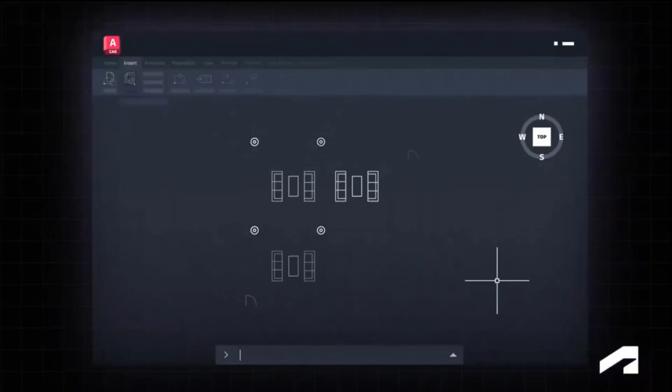Or game-changing innovations like Autodesk AI, which unlocks powerful insights and immediate ways to accelerate your creativity, and intelligent features like Smart Blocks, which let you quickly define and group objects so you can roll out edits project-wide.

Or workflow optimizers like Autodesk Docs and AutoCAD on the web, which help you collaborate and sync feedback from multiple reviewers on projects. Great design doesn't come into this world by chance—great design starts here. AutoCAD, trusted by millions.

AutoCAD 2026 arrives with promises of speed, intelligence, and seamless collaboration. But does it deliver? In this investigative breakdown, we analyze the real impact of its new features, separating hype from tangible innovation.

Let's dissect what's new, who benefits, and where Autodesk might be cutting corners. First: performance. Faster than ever?

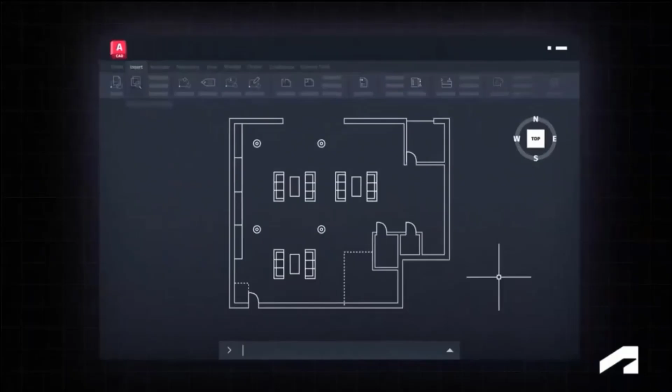AutoCAD 2026 claims 11x faster 2D or 3D file opening and 4x quicker startup times for network stored DWGs. While these metrics sound impressive, real-world gains depend on hardware and network environments.

Asynchronous raster loading lets images load in the background, reducing wait times for complex drawings. Fast shaded mode enhancements bring new hidden and conceptual visual styles that improve navigation in large 3D models.

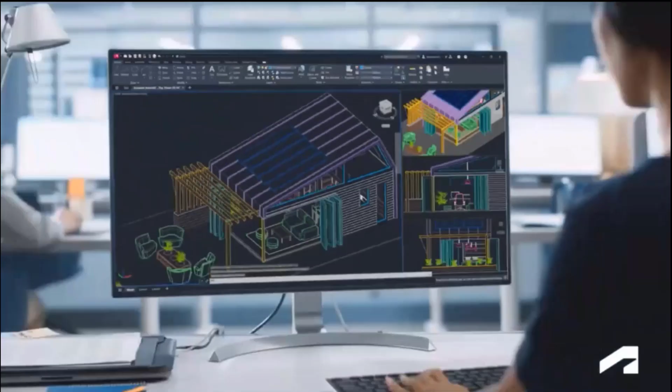GPU text optimization provides better rendering for CJK and RTL languages, such as Arabic and Korean, using DirectX 12.

Performance upgrades are significant but hardware dependent. Users with older systems may not see drastic improvements.

Second: AI-driven workflows, where smart blocks take center stage. Autodesk AI is now deeply integrated, but its practicality varies.

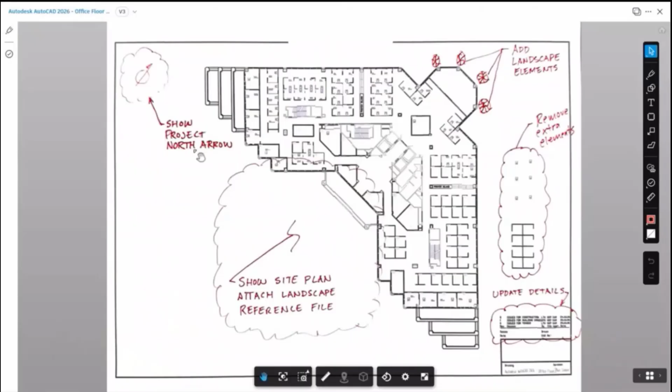Smart blocks support search and convert, handling text variations like converting variable text, for example room numbers, into block attributes, automating repetitive tasks. Ribbon accessibility has improved too—BSRCH, previously command line only, is now ribbon friendly.

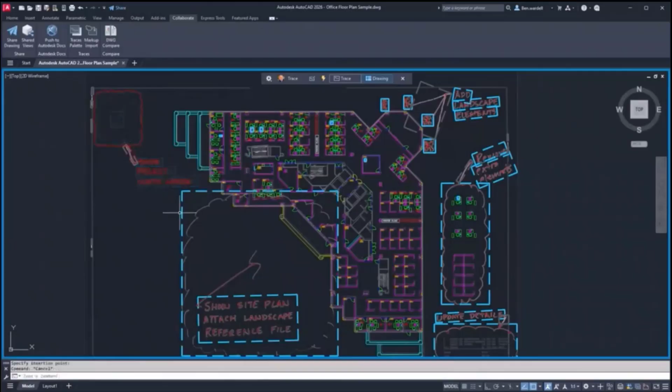Smart blocks also support detect and convert. Machine learning detection identifies architectural objects like doors and toilets for block conversion, but struggles with non-architectural geometry. Primary instance editing refines detection results by modifying the seed object.

While powerful, detect and convert remains a tech preview with limited scope. Architects benefit most; mechanical designers gain less.

Collaboration, cloud integration or lock-in: AutoCAD 2026 pushes hard on cloud-connected workflows, but not all users may welcome the shift.

Connected support files, project-specific fonts, templates, and plot styles sync via Autodesk Docs, reducing manual setup. Multi-user markups allow simultaneous feedback via Autodesk Docs with trace layers and shareable links.

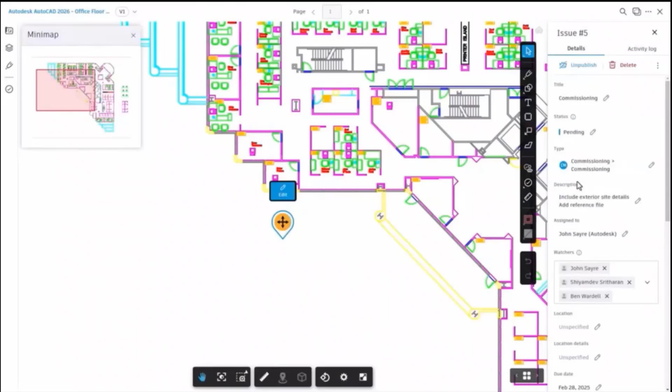Activity insights: the what's changed feature tracks edits between saves, though it's limited to AutoCAD users in local, LAN, or cloud-stored files. Collaboration tools are robust, but tie users deeper into Autodesk's ecosystem. Teams on Google Drive or Dropbox miss out.

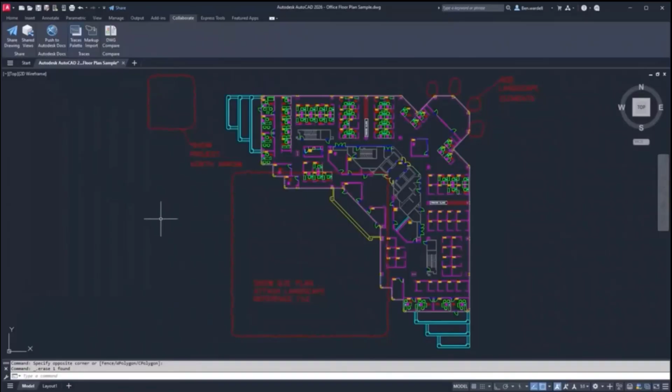Under-the-hood tweaks, niche but notable: the center layer system variable sets default layers for centerline marks, a small but overdue win. GDI plot enhancement offers better Windows printer compatibility, though heavy plotters may not notice.

Customer survey pop-up feedback prompts are closed, useful for Autodesk, annoying for users.

The elephant in the room: is this update worth it? Pros - AI efficiency: smart blocks save hours on repetitive tasks. Cloud collaboration: streamlined for Autodesk Docs users. Performance: a boon for large file workflows.

Cons - ACC dependency: many features, for example connected support files, require Autodesk construction cloud adoption. Half-baked AI: detect and convert has architectural bias, and its tech preview status limits utility. Incremental updates: little for non-ACC users beyond performance tweaks.

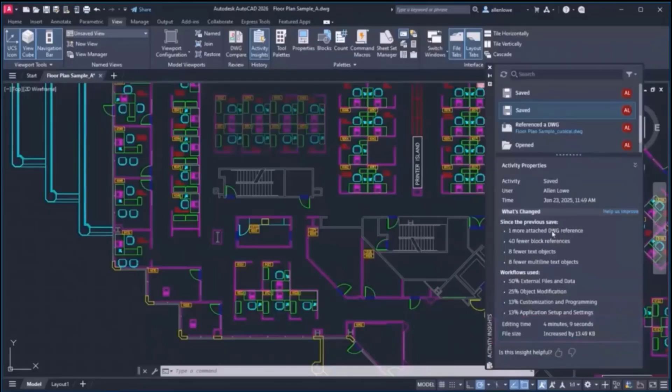Conclusion: who should upgrade? AutoCAD 2026 shines for cloud-centric teams and architects leveraging AI-driven blocks. However, casual users or those avoiding Autodesk's ecosystem may find fewer reasons to jump.

While performance gains are real, the update feels like a stepping stone toward a more AI-integrated future, one where Autodesk hopes to lock users into its platform.

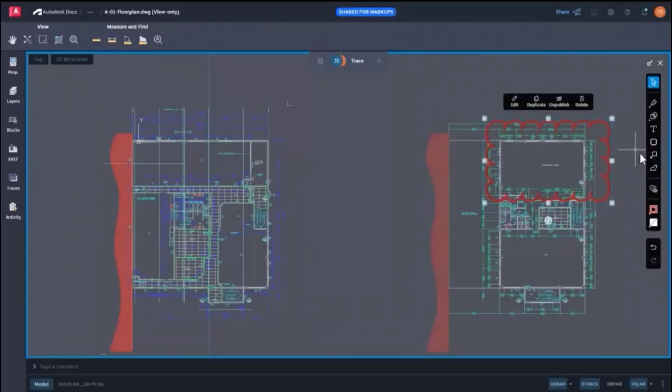Final thought: if collaboration and automation are priorities, upgrade. For others, weigh the cost against marginal gains.

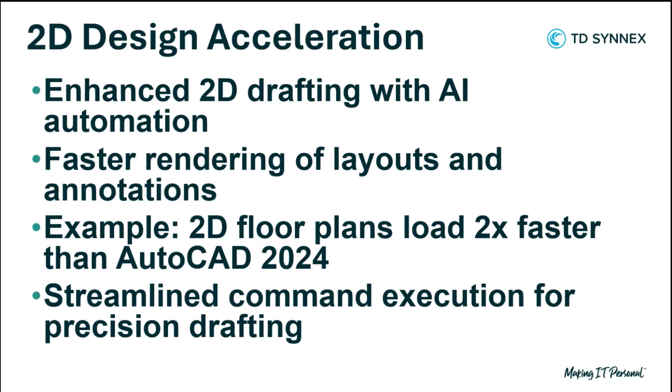Okay, I will go to the software and then after presenting in the software, we go back to the slide again. If I explain about the slide first, maybe you can imagine what happened in the software. So I will switch the sharing to the software first.

Okay, can everyone see my screen software? Can you show on screen? Hello? Okay, everyone can see my screen, right?

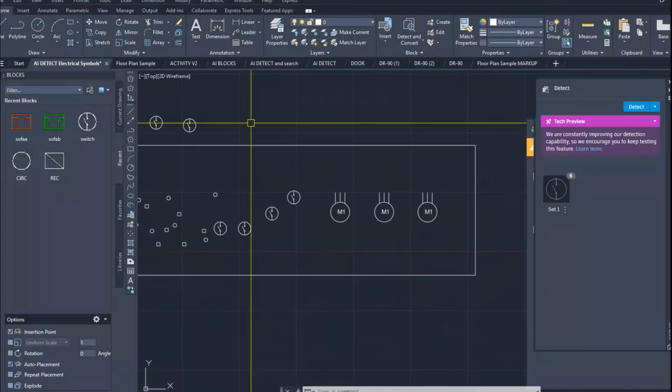First of all, I want to show you the detect and convert to block feature. The situation is like this: when you have anything like a circle and a line connected to each other and it becomes a symbol, for example an electrical symbol, you want to detect and convert it to an AutoCAD block.

But you can't find them one by one because there's quite a lot on the screen and it's quite messy. You can select one by one, but it takes time and is a repetitive task, as I mentioned before.

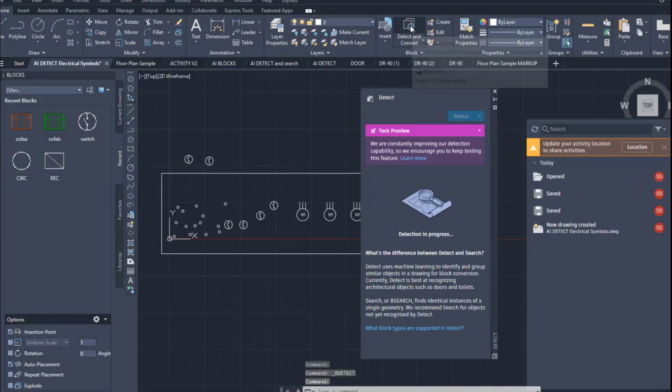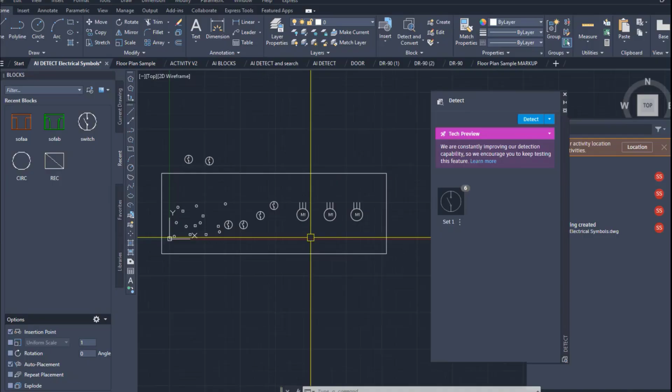So we use detect. The tool comes from the home tab, and you can see this button is detect and convert. Once you call this command, a dialog pops up, and the magnifier moves around to show you that it's calculating and detection is in progress. Then you can see that it found the symbol, the electrical symbol that I expected.

So this one is called set 1 and has six pieces. I would like to know where the 6 pieces are, so I convert to block.

Once I choose the convert to block command, the next dialog pops up, and you can see that it turns green to show you it's detected. Then you just choose the option to create a new block, or include it in an existing block. For example, we have 5 blocks already in this drawing, but I want to create a new one.

I type the name, maybe the switch. Switch is already taken, so I will type switch push button instead. Maybe push button instead. Okay, this one is free to create.

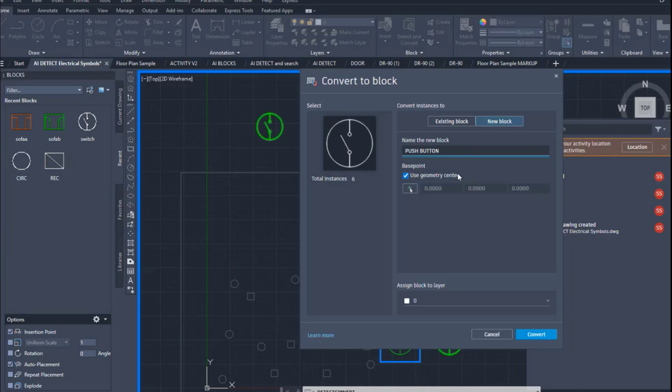Then use the geometry center, or I can choose the insertion point. For example, I want to put it in the center of this circle, then put it in layer 0, and then convert.

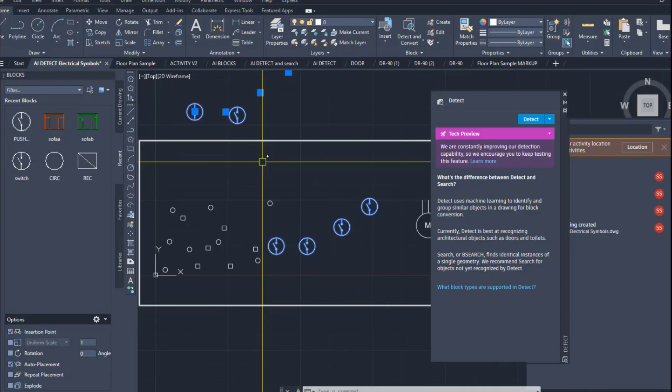That's it, we got 6 blocks from this detect. You can see these 6 blocks created by the AI. AI detects the entity and informs you that it has a similar picture, so you can choose to have the system convert it. Okay, I will undo to go back to the original state.

Okay, until it's back to the normal entity. The second choice is search and convert. In this case, I have to inform the system by selecting one of it and then right click.

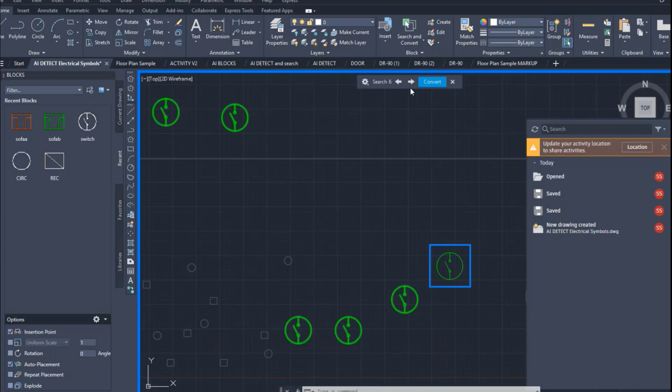Here we go, the same results have been taken. You can see that this one we selected is going to detect 5 more pieces. We can go one by one using the arrow key from left to right. You can see it had 1/6, meaning it detects 6 pieces, but this one is the first piece. The next one is the second piece from the 6. The third one, we can go one by one to analyze.

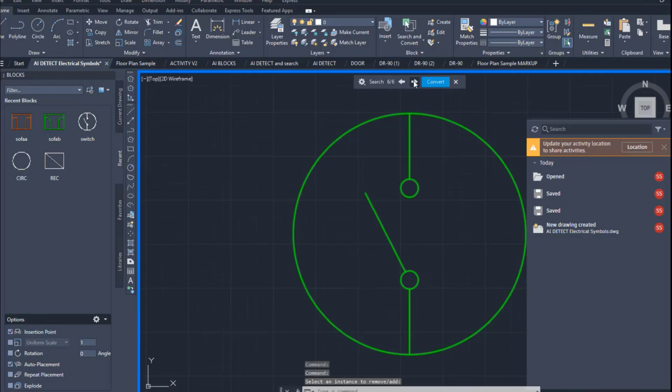If we're quite satisfied with the results, we can use the convert button, hit it. Here we go, the same dialog back again, new block. And then this one, we try to do the push button, but you guess what will happen? Nothing, right? Because I have undo.

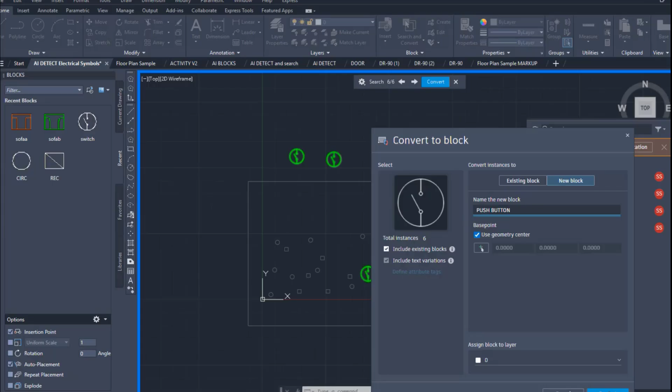So this one is free to create as well. And this one, I don't want to use or select on the screen anymore. I just use the geometric center to reduce my time to create the block, because it depends on the type of block you want to create. If you want to create by the anchor point at the low bottom or anything, you have to select. But this one, I just use the geometric center. And then convert again, here we go, the same result.

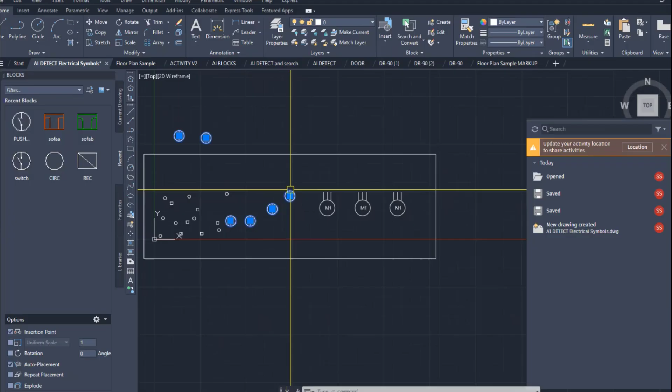You can choose to use the detect or the search, depending on your choice. This one is quite useful for me because many years ago, I had to convert one by one, or if I converted one piece, I had to delete the 5 pieces and then place the block I created at the position again. That's quite tedious. My wrist hurt a lot because I had to click many times in a day of working, quite painful. But nowadays it's helpful and reduces the clicks of your mouse, saves your wrist, saves your time, many things.

This one, these 2 commands created, is an AI-driven feature that I mentioned before. So you have to remember it's under the Home tab.

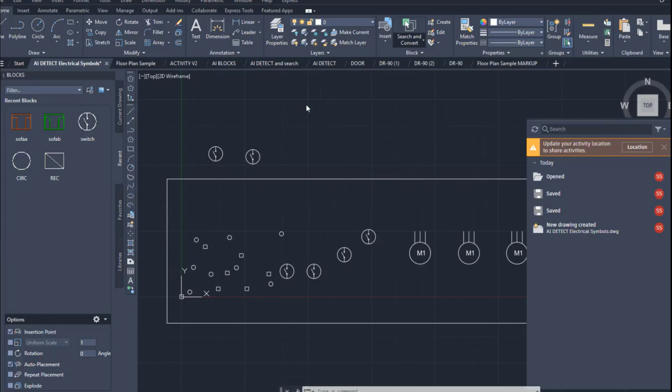Okay, the next thing that I want to show you is the block. Okay, I will create the new file. This one is the block that we use, that we recently created. So it comes from the block.

In here, you can call this dialog from this. You go to the Home tab, go to the block, and you pin it. And then this one, you use the recent blocks. This dialog opens. This one is property, close it. You can see that your recently created block is inside this one.

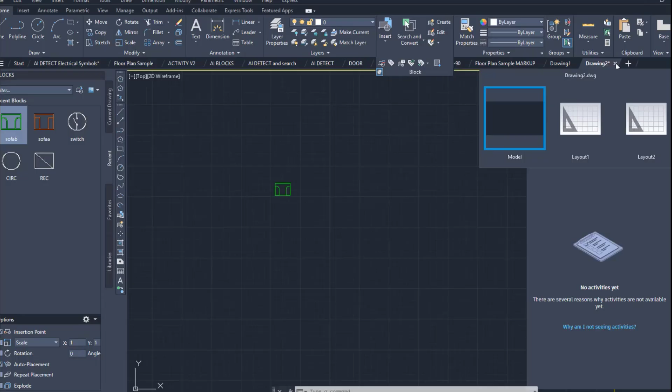You can create many new files and then use the block that you created, so you can close the file that you created. So you don't have to worry that the block created in my first file can't be taken by the second file, but this one you can. It's like a central location for creating blocks.

So the next AI feature I want to show you is, for example, if I place the sofa, this green one, and I want to create a room, for example, this rectangle I assume as a room. So next time I put this block, I click and then redefine the block. You can see that once my cursor goes near the lines, it will detect and put it in the location, making the gap between the left and the bottom the same.

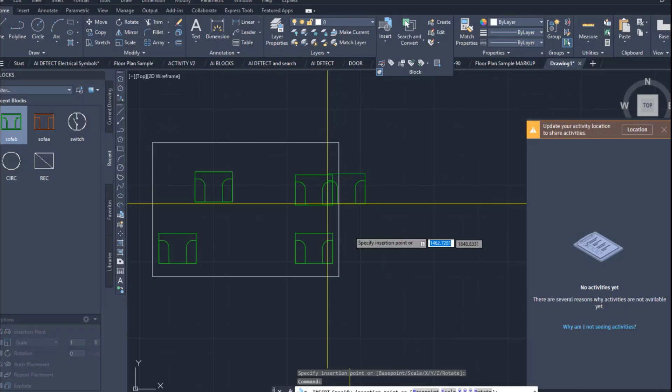You see, again, go to this line. We try to do it. It's not limited to two lines perpendicular to each other, but just a single line also you can put here. The AI will detect the line and make it easy to put. We do not have to worry about the gap anymore. But it had to...

Practice more. For example, if I create another room, okay, I will delete this one first to show you the AI will detect. You can go to the line here or the corner.

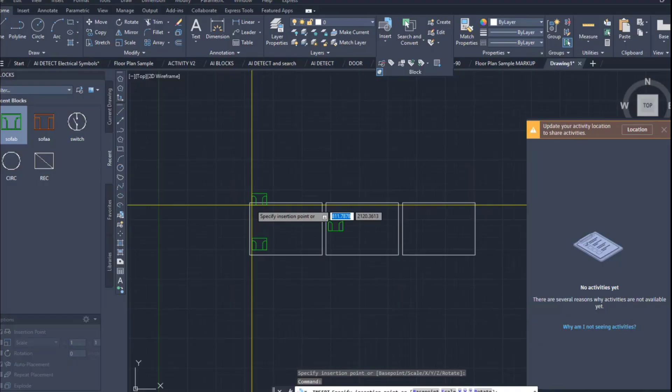You can see, but it depends on the cursor moving, so you have to move to any corner to test the files. Okay, to test it, maybe it's not right. I will use this one instead to try another one. Okay, you can see, here we go.

But actually, we don't have to put one by one like this because if it is the same, normally we use the array, right? This one is for another location. Okay, here this one, so maybe you have to move close to the line and the software is going to detect.

This one, for example, is useful when you're doing a condominium. When you mirror the room, it lets you know and you want to put more sofas. The system will detect for you here. Maybe you have to go to one line to make it know that you're gonna snap to any line, and then you can see the one line. Try to move to the line first, and then move to the corner. Here's a trick: do not go to the corner directly.

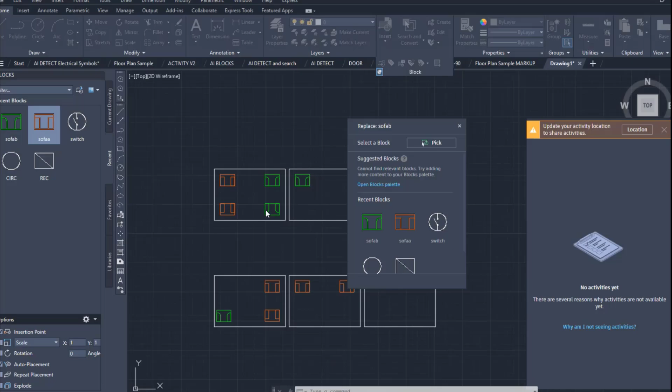Also, you can change the symbol to another block. For example, if I want to change both the green and the orange, so far four things. This one is different, right? So that means you can't change the two blocks altogether, you can only change one type of block, and then you go to switch.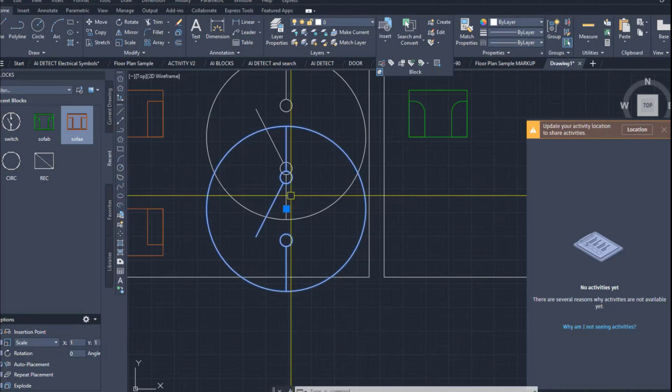You can see the switch will also place in the position where it's detected, using the insertion point as the common reference for the green and orange, and the switch uses the insertion point as the same reference. So when you create the block, you have to be careful about the insertion point.

Okay, I will go back to replace again, and change to the green one. Again, first we select the block that we want to replace, and then here we go. Quite useful, quite useful.

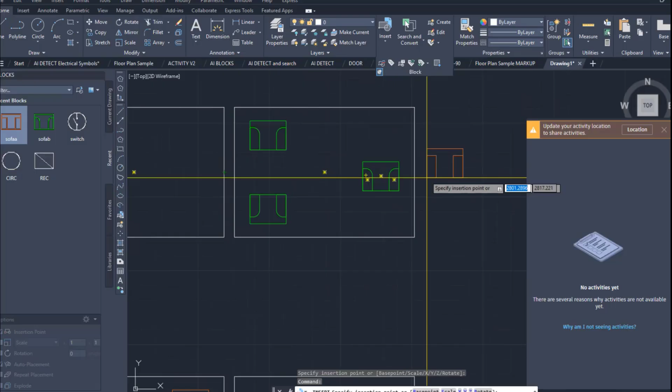Also, outside of the room, you can snap too, you see? So it's not limited to inside the room, the outside also works. But when you have object snap on, if it makes you confused easily, you can turn off the object snap and snap just by hovering your mouse. Here we go.

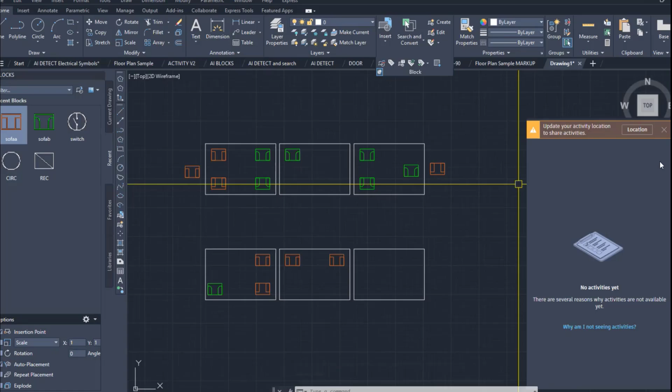And then the next one is I want to do the trace collaboration, the trace palette. I will create a new one, the new file, new trace, new file. Okay, you can see this is the trace that you can see in your file. This is a new file, right? So this is a trace one.

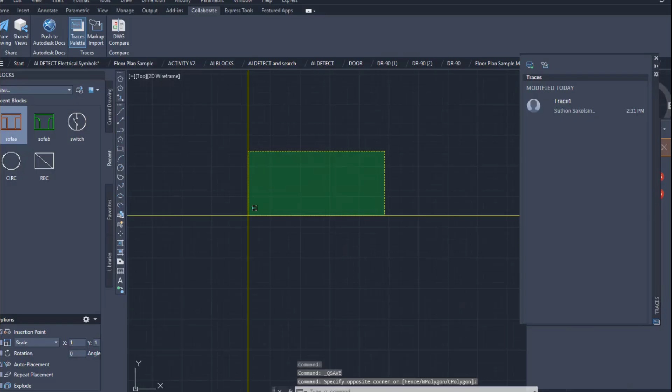Once you save the file, you go to close it and save this file, for example as AAA, and then you clear the line here, and then you clear the trace. Anything you type in here, for example, detect.

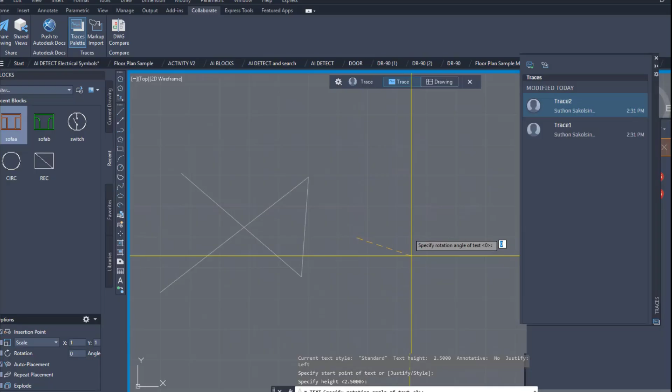Okay, and you put the text in here, and then close this one, and close this. You can't see the text because it's in the trace, but when you click the trace, you can see the text. So it's like two spaces. The space that you're working is on here.

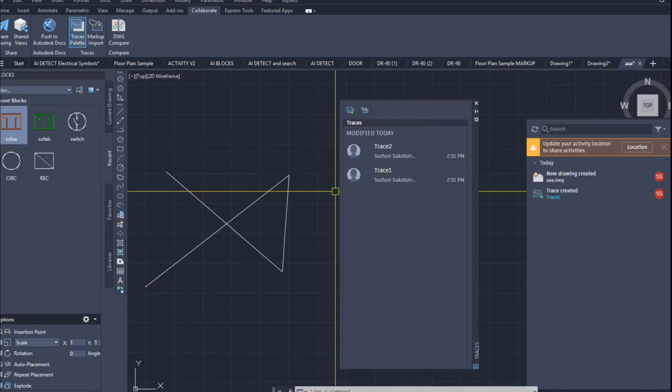Once you want to collaborate, this one is used for collaboration, right? And then you use a trace palette. The trace palette shows the history of the files that you want to trace. The trace one you just create by nothing.

You can also draw a circle or anything in this space, and then close this one. You can't see the circle, right? But when you click the trace one, you see the circle. That means you can mark anything in the drawing and it stays in the same drawing.

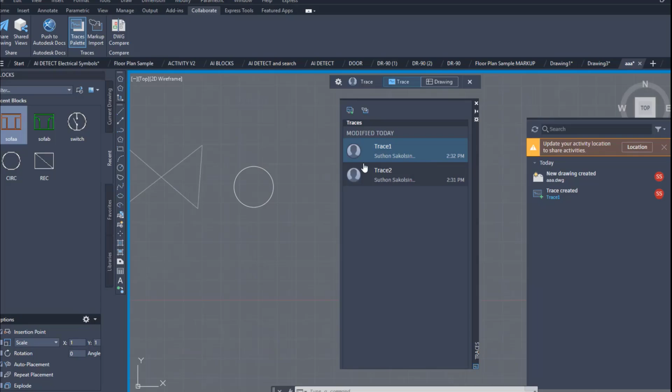But once you're out of the space, it doesn't affect your work anymore. Your work is still your work, but if you want to add something to tell your colleague or stakeholders, you can do the trace one, add any trace. That means the destination section can check the trace and see what you mentioned in the drawing, and after they understand, they can close the tracing and do the work that you mentioned in the trace. That means you can add a message to your drawing. That's the trace one, quite useful.

The next nearby feature is the markup import. For this one I will go to the file, for example this one. The trace and the markup work together. When you want to import the markup, you can choose two choices, the picture or the PDF.

You can see that we have the markup drawing, right? The file formats that we can add are PDF, and JPG or JPEG or PNG. So that means the markup can only be these four formats. You can't add BMP because BMP is not a supported format for the markup.

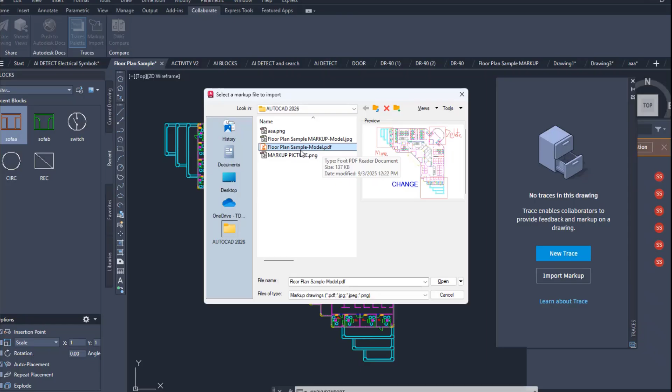What does it mean? The JPG is a picture, a raster image, right? And the PDF is vector created. So you can use both. For example, the first one is the PDF that we're quite familiar with, because when doing AEC work, everything is communicated using the PDF format, right?

And then we open the PDF. The system AI detects what's inside the PDF and places it in a position that you can compare to the work that you're doing. Once you think it's in the right position, you just accept. In case it's not placed in the right position, you have the option to move this PDF file to compare in the drawing, or make alignment or rotate it.

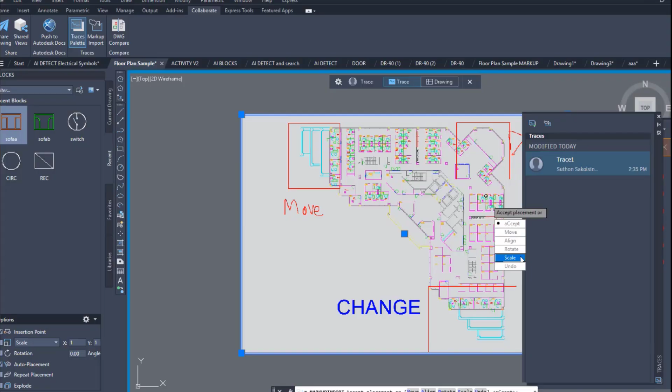But I frankly tell you that we rarely use the move, align, rotate or scale, because the system is quite smart enough to match the position for you. So mostly we just accept, and the position is aligned.

And then we go to the drawing. You can see that the system detects what's in the PDF file. So what's the difference between your work and what's inside the PDF file that gets detected? For example, this one, you can see we have the handwriting 'move'. So the system can read your handwriting. Once you click on the blue dashed line, you can see that the system knows you want to show the move text. It's readable.

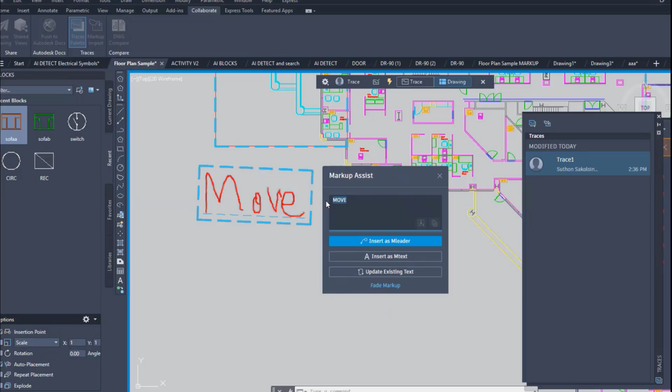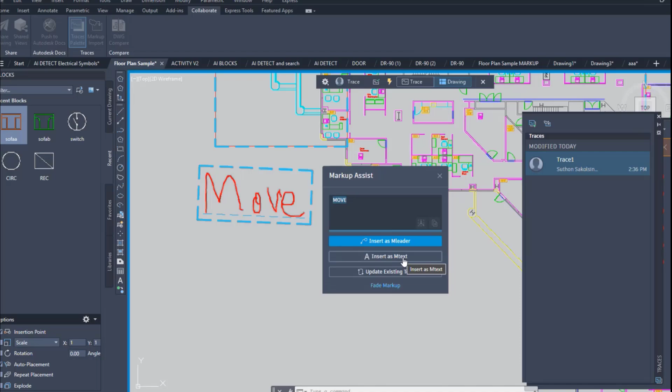So it's close to human, right? A human can read this 'move', but the computer also knows it equal to a human. So this one says 'move' as well, and you have the option to insert as MText or MLeader. In this case I will use the MText, and then place the position. But you may see that the move text is quite small, so it's not a problem.

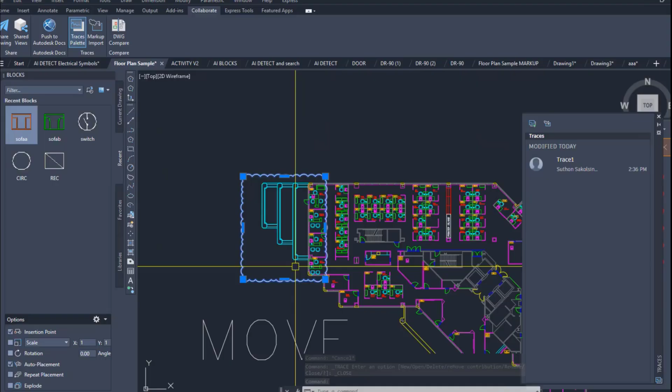We go to the properties, and we can change this to about 300 inches to make the move text quite big. And then this one is for the rev cloud. I want to change it to a rectangular rev cloud. I'll show you just two first, and then I close this, and you can see that the system creates the entity for you automatically by transferring what's inside the PDF to your drawing.

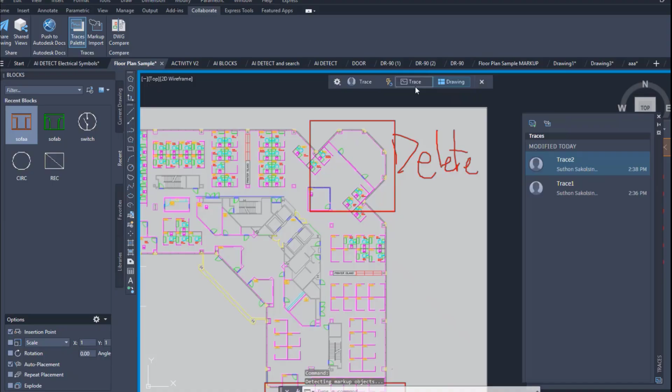Again, we can use the markup import a second time and accept and go to the drawing. But it may take some time to calculate or check things. You may need to switch back and forth and open the lighting, or you can check the transparency settings to make it active.

You can close this to see your drawing, because once you turn on the drawing background, the PDF goes in front of the drawing. But when you turn the light off, you can see your work. The system may take a little time to detect and calculate. Wow, this one is quite a big auditorium or office, so let's see if the system knows this is a delete or not.

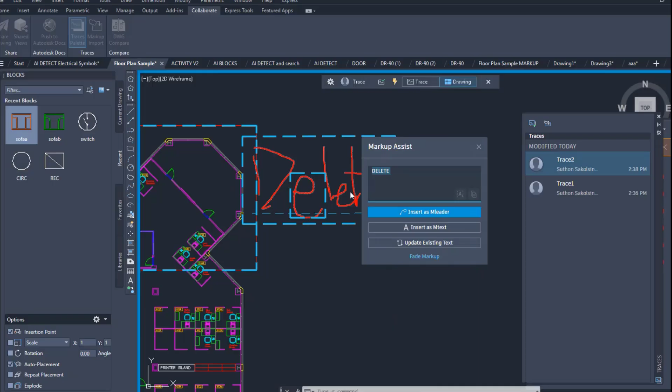Once I click on the blue line, the system knows this word is delete, meaning it can read my handwriting. That's a surprise, right? The AI is quite wise enough.

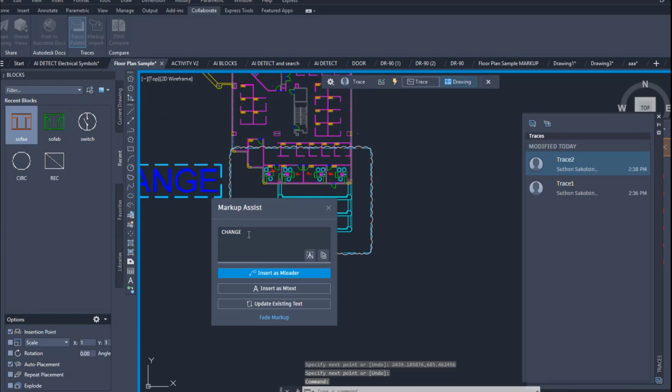I change to the revcloud, this one as well, change to the revcloud, this one change. I want to put the change text in here. Once we finish adding the revcloud and the text we mentioned, we have already transferred the message from the PDF to the AutoCAD DWG.

Then we go to the property section and change this to 300 inches for the text. This project is quite big, so 300 inches for the text.

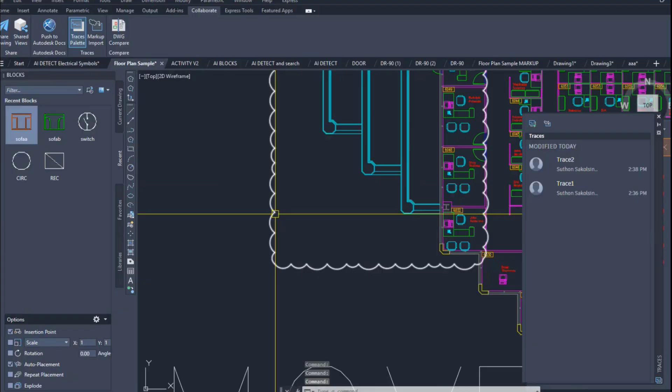Here's the revcloud, and you can modify more on it. Go to the property. If this one is too detailed, you can open here and change the arc length.

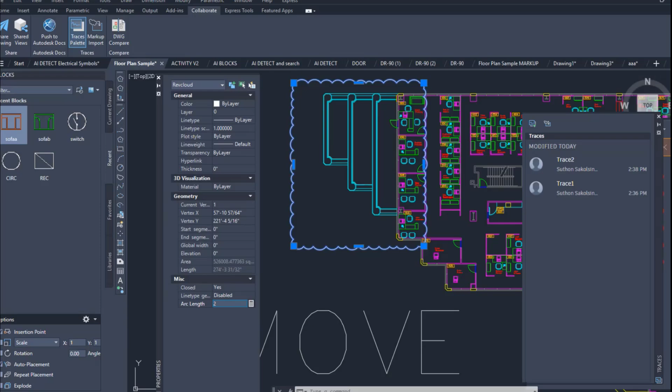Since this is the imperial unit, maybe you change it to 20 feet here. You can see that the revcloud can be modified later for the length and the position as well. You can change the property of it to suit your need.

This one is the AI and the trace as well. You can see that on the trace tool, it's going to show you the word and anything you write down here, and once you save...

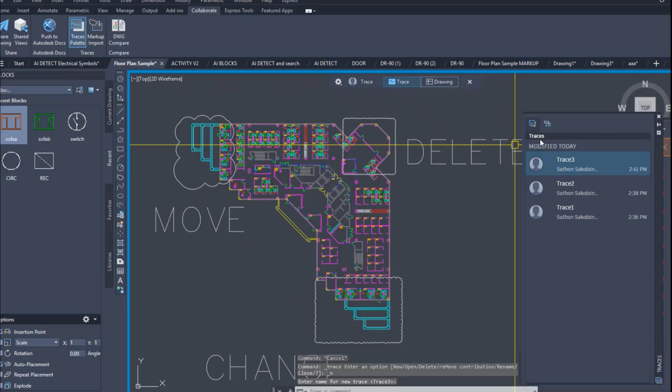You make the trace number 3, anything imported as markup as a trace here. The trace is going to detect it, okay. This one is for PDF, so I will delete it.

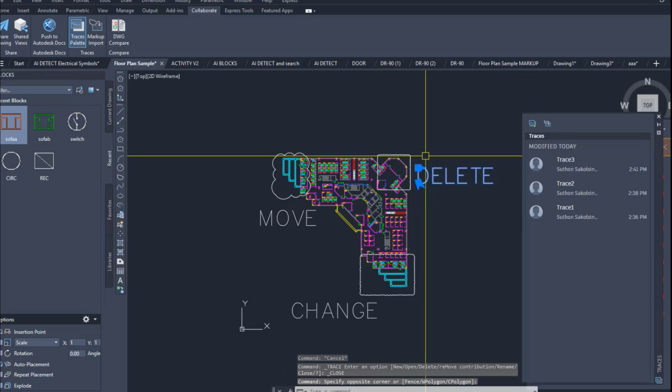The next thing we're going to compare is the raster image. So I go to the markup import, and this one is the raster image, PNG format. Same thing as the PDF: I accept, and then I go to the drawing.

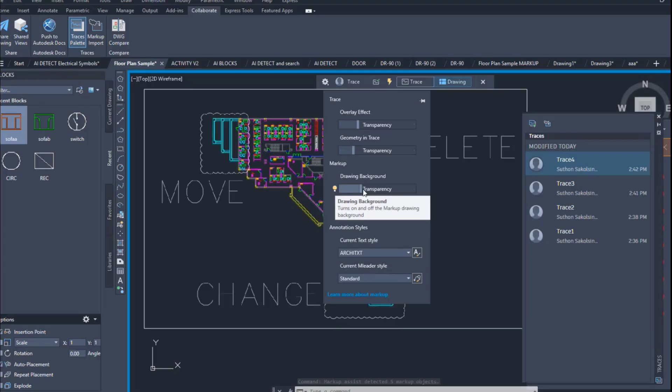Let the system calculate a little bit. We can't see because we turned the light off, so we have to turn the light on, and then adjust the transparency a little bit. If you insert the picture and nothing happens, maybe go to the gear button and turn it off and on, adjusting something to make the system active.

After that, the system is going to detect the differences, and then you can make the revcloud. The raster image result may not be as good as the PDF; maybe PDF is better, but with this one you can have the reference and try to do the same thing. It depends on the resolution of the picture as well. If you compare with a raster image that has high resolution, the result may be better.

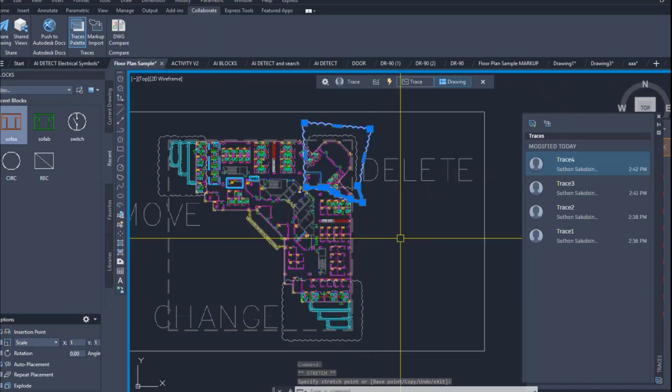Go to trace number 3, and you see trace number 4. The system is going to trace every step that you're doing with your drawing, so you can trace what happened in your drawing. In previous versions, we didn't have these traces, so we didn't know what changes had been made in the file - we just saw the last result only. We couldn't trace back to any activities, but with this one, you can trace back to any activities that happen with your files.

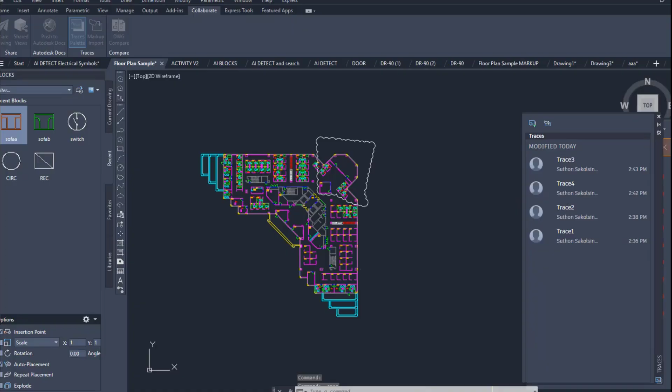That's quite useful. And then we also have the DWG compare. When you close this one, DWG compare lets us compare two drawings together. For example, if I open another file - this one, I already opened it - we want to compare with drawing number 2 open. The difference will be found between the two drawings in comparison continue.

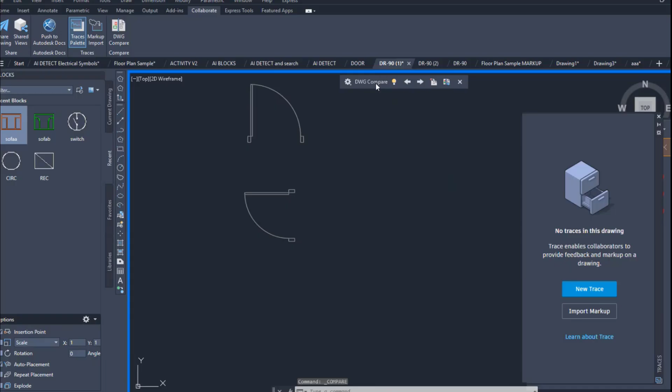We have to check, maybe open the two drawings first. I will open it. You see, is this the same, right? Maybe we use another drawing to compare. You can see that the two drawing differences are shown in different colors.

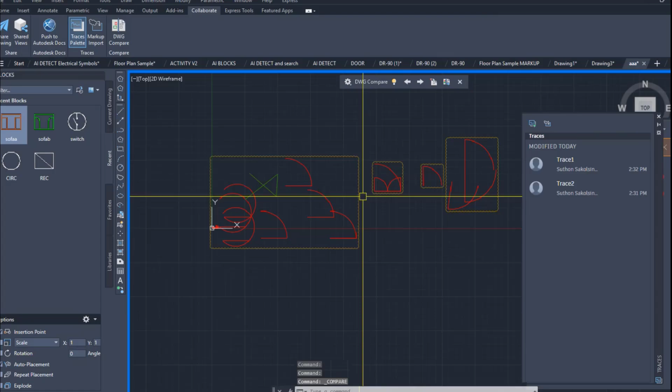Then we continue. If we're just satisfied with the result, we can exit compare directly. If nothing happened, okay, but we want to compare again, go here and then continue. You can see that the system is going to make a left cloud covering all the different places, and then you can go one by one to analyze what the difference is here.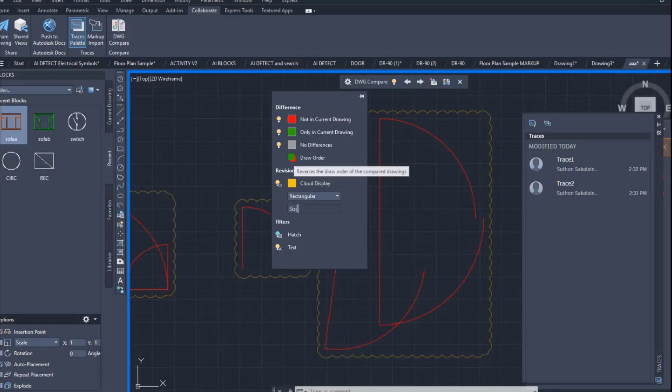With the DWG compare, the red color means it's not in the current drawing, because now we're in the clean drawing. So the compare drawing is red. We can see from here, turn off the compare current drawing, turn off - no differences.

If it had the common lines or entity, we see it as a gray color, no differences. The draw order - we want to show the revision cloud in any color. For the default, it's an orange color. Here we're showing the rectangle, polygonal, to show one by one each, or we want to show as a group to the rectangle.

This one gonna be hidden sometimes, so if we want to show it, we can pin it here and see. We can turn off the hatch, the text, but we don't have the hatch or text in any drawing to compare right now.

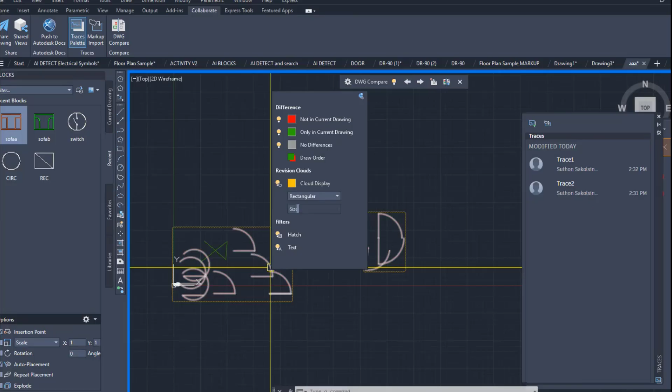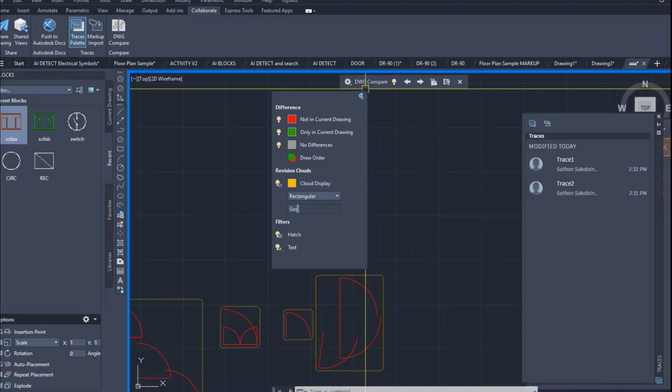At this moment, we reduce the time to check the drawing, to verify the drawing. Imagine if you have a big drawing, many big drawings, you can visual check but it might take time and hurt your eyes, right? But this one helps you to check only the differences, the common thing - you skip those, ignore those, you don't have to do anything. So you can see that's quite a useful feature that I recommend you to use.

And once you want to import, you know that it's different already, right? And then you want to import, or you want to export snapshot - it depends on your choice. If you don't want to mix between those two drawings together, you can export to another snapshot.

But this one I want to import. What do we want to import? I want to import all here. And you can see that now there's no differences anymore because I imported already in the green drawing. So you just use the match property to match the entity.

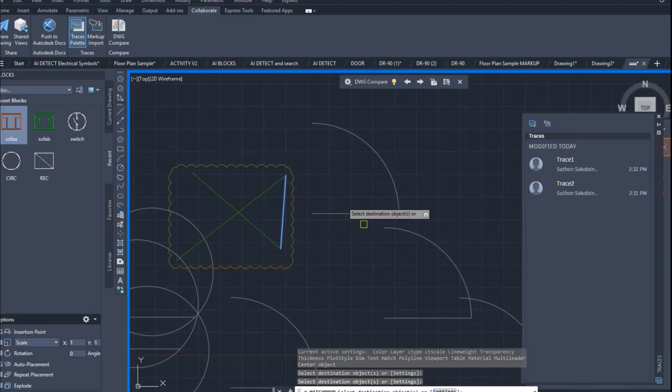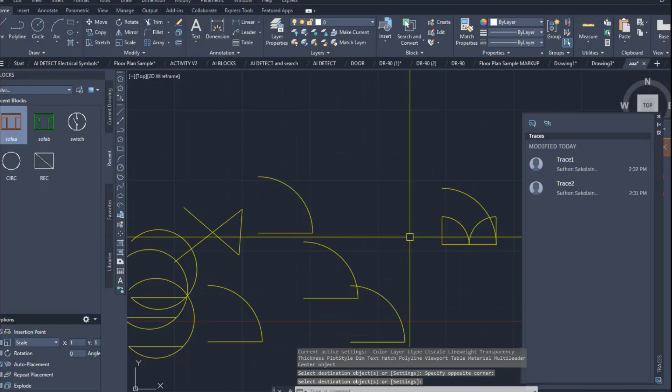Maybe it's not - you have to turn it off first. Here we go, you can see that we can't match property while the tool is still active. You have to turn off the tool first, and then after that you can use the color. Maybe I change to the yellow color, and then I match property this one to all the lines. Here we go, you can see that it's the regular entity already inside.

It's a compare. So this traces, markup, and DWG compare you use a lot. And then if you know about Autodesk Docs or you have Autodesk Docs, you can push this file to Autodesk Docs for sharing the common data environment for all the stakeholders to see your work all together, working in the same file together.

This one is for collaboration among your team. But right now, this one is Autodesk Docs - we already did the seminar last time, the webinar last time. My colleague talked about this already, so you can go back to see the recording.

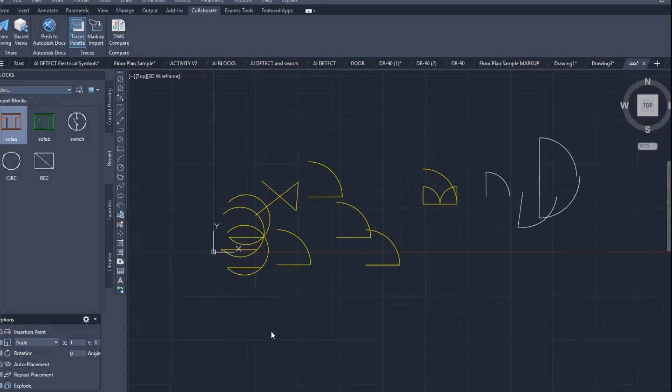Okay, let's go back to the PowerPoint.

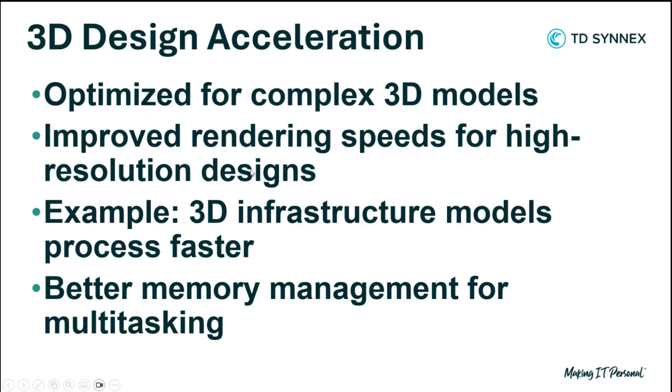Okay, let's go back to the slide. You can see that a lot of features that I'm showing show the AI's efficiencies of the software. So we go to the 3D acceleration, also the speed increase, and the 2D workflow.

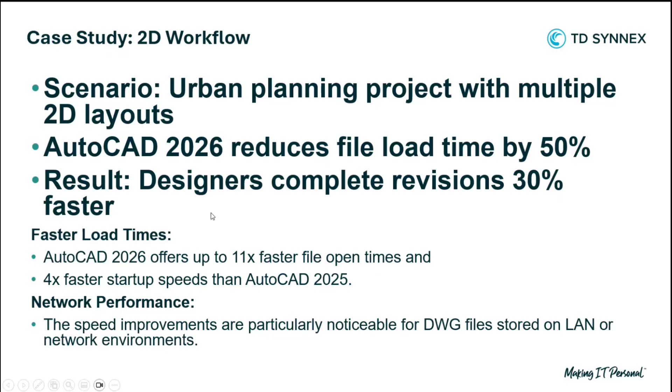Because 3D can do in AutoCAD, but it's called the native model. Native 3D is different from the Revit file - Revit is parametric 3D, right? So this one is like the clay - you're doing the clay model of your work, so it's not containing the parameter inside.

So mostly we use it in the 2D field like this. This is the example of the work that uses AutoCAD to do about the urban planning, right? You can see that it's helpful, right?

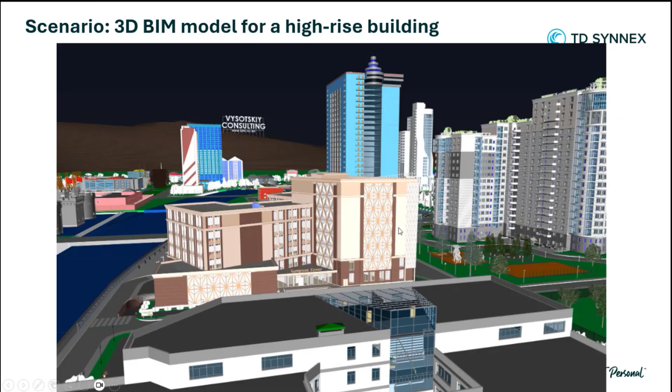And the 3D as well - AutoCAD also can do 3D. So you just attend my courses or my colleague's courses and you can do like this one. So it's helpful a lot.

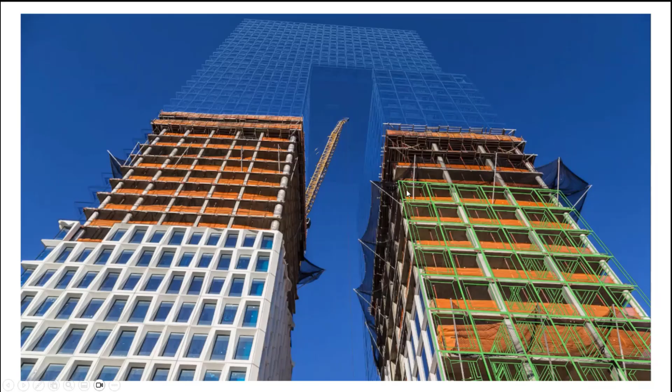And you can see that we have the work at the bottom, and the top one is what we expect to do in the AutoCAD. And then you can imagine, make this one.

And also you can export this one to the VR section as well. The VR section gonna make the model and visualize with the VR AR for you to see what the result gonna be. You don't have to imagine - you can see in the computer.

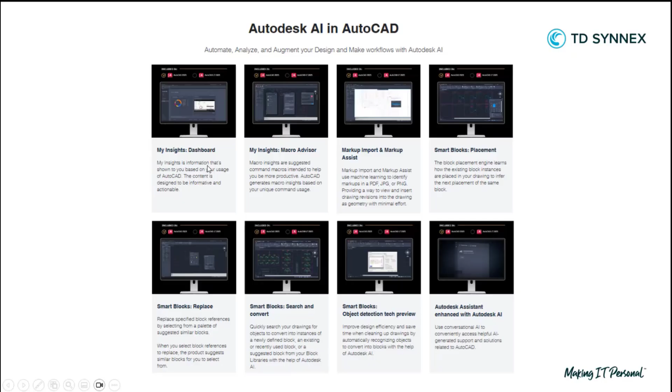This 8 feature is the summary. So what we talked about - the markup import, right, the block placement, the replace, search and convert, object detection. Okay, we have the Autodesk Assistant, Macro Advisor, and dashboard that we gonna talk more, but the time maybe is not much. Maybe we go to the next part 2 in the next webinar.